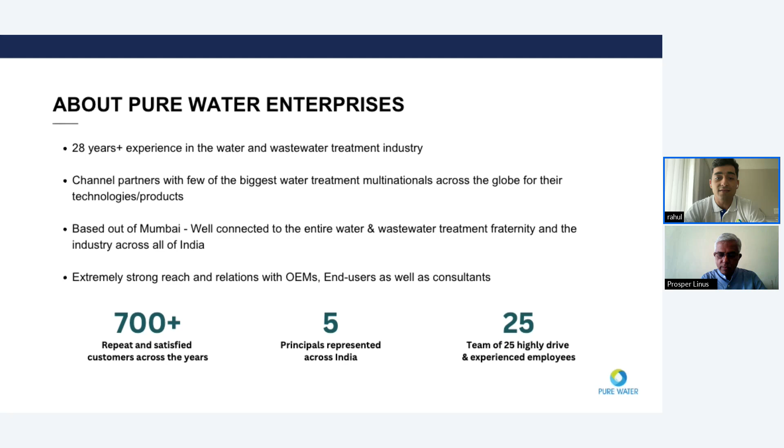Pure Water Enterprises has been working in the water and wastewater treatment industry for the past 28 years. We work very closely with OEMs, consultants, and end users all across India, mainly in reuse, recycle, and advanced treatment applications. As a company, it has always been an endeavor to bring proven world-class global technologies to the Indian market and conditions, whether it is Veolia's UF, RO, NF, and MBR membranes, Purolite's specialty ion exchange resins, Energy Recovery's pressure exchangers and booster pumps, Xylem's submersible mixers and UV, and even NatureWorks' glass filtration media. We always strive to get the best technologies in India.

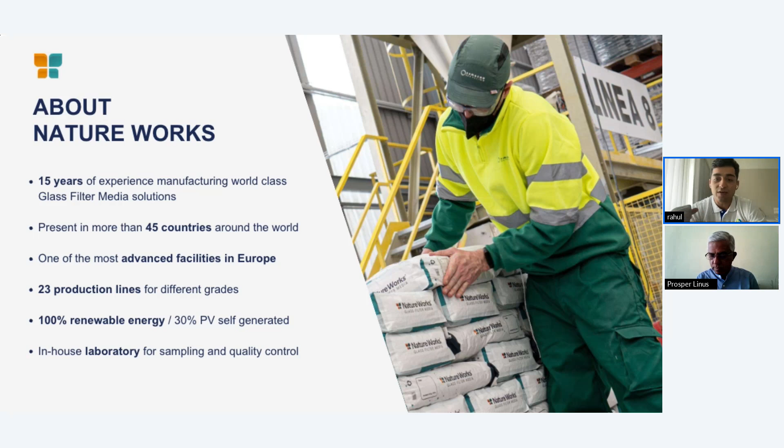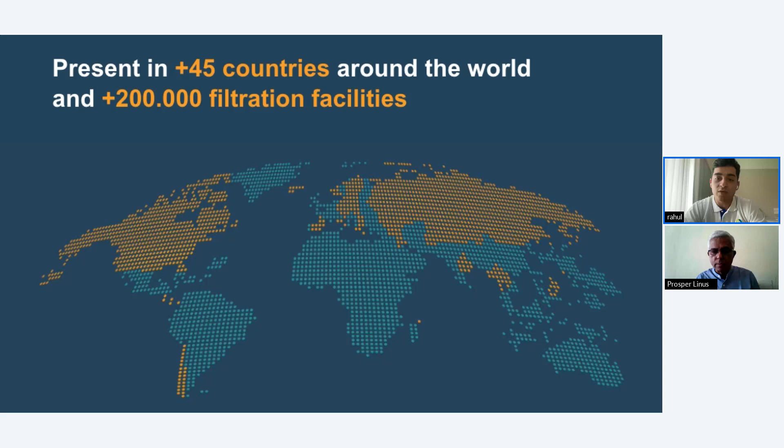NatureWorks is based in Alicante, Spain, and specializes only in glass filtration media. This focus is extremely important as this is not a side product for them, it is their core expertise. NatureWorks operates in over 45 countries with more than 200,000 installations, that's 2 lakh installations all across the world. We also have approximately 200 plus installations in India, and this number is growing very quickly across various industries and applications.

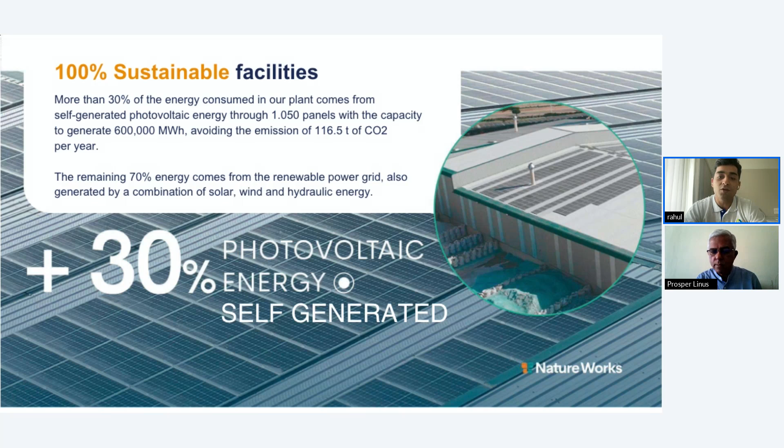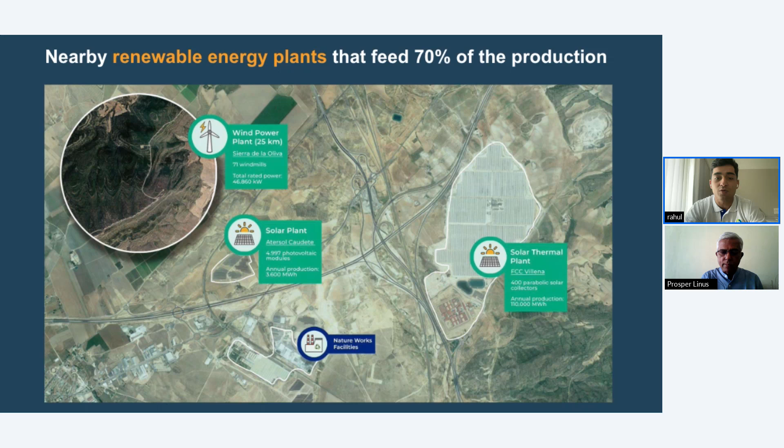The manufacturing process followed at the NatureWorks facility in Spain is 100% renewable powered, which speaks even more to their unwavering commitment towards sustainable practices. 30% of the total energy is self-generated through photovoltaic panels installed in their facility, whereas the other 70% comes from a renewable power grid running on a combination of wind, solar, and hydraulic energy. Speaking from a logistical point of view, NatureWorks has direct access to the world's major ports through the Valencia port.

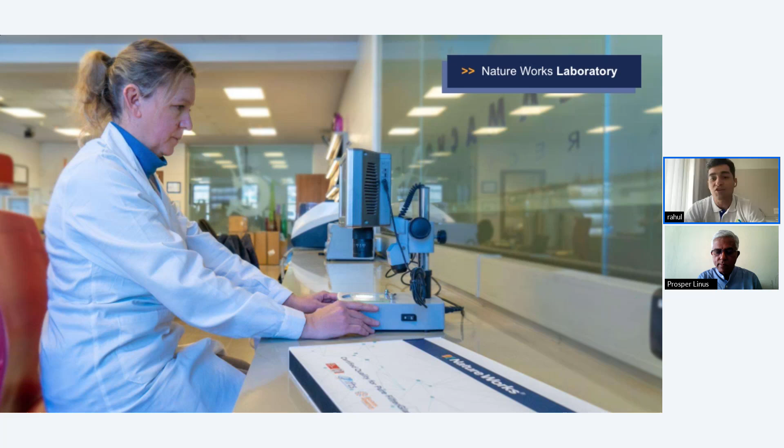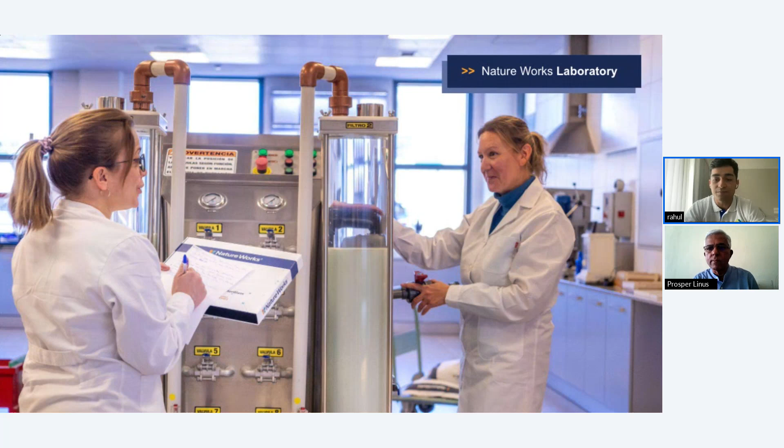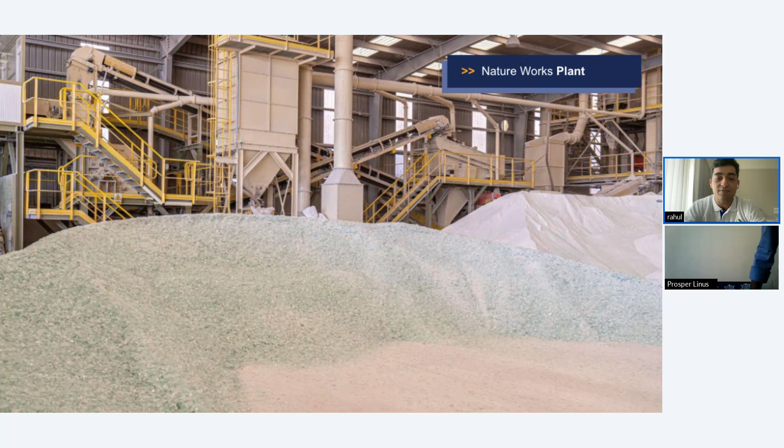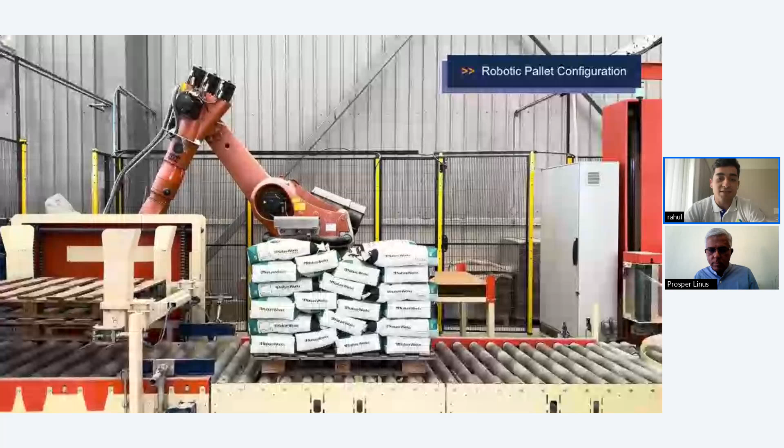In the next few slides, we will walk you through the various state-of-the-art facilities at the NatureWorks Spain factory. What really matters here is consistency and control over even the smallest steps in the entire manufacturing process. Through continuous investment in R&D and product development, NatureWorks makes sure that their glass media is constantly evolving and keeping up with advancements in the market and market needs. Every step of the manufacturing process is entirely controlled. The facility adheres to the highest standards of sanitation and cleanliness, reflected by numerous certifications such as NSF 50 and NSF 61. The automated packaging ensures that every batch performs the same. Consistency and predictability is key in filtration applications, and our glass media helps achieve just that.

Let's take a step back now. Sand has been used for water filtration applications for the past 200 years. It is reliable and gives acceptable results, but it hasn't evolved since. Meanwhile everything else around it, including the vessel, the internals, automation, everything else has advanced. This results in a huge gap: limited efficiency, higher water use, higher energy consumption, water channeling, and biofouling, all of which can seriously hamper the efficiency of a filtration system. That's the issue we are going to address today.

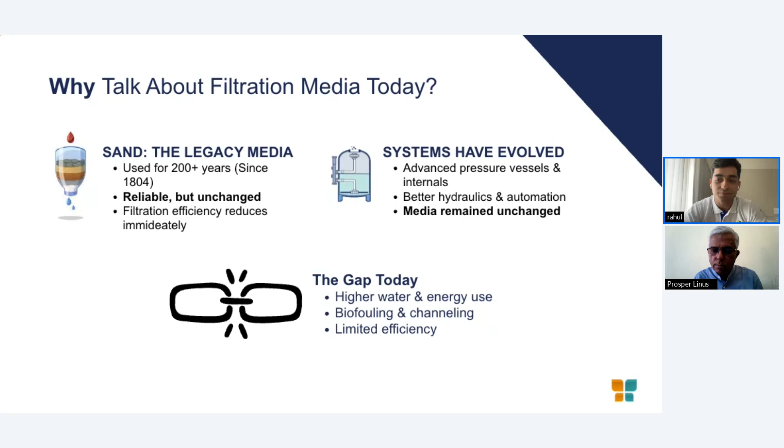NatureWorks glass media is specifically engineered for a very accurate particle shape, size, curvature, and surface. Hence, it is controlled in nature and very uniform. It is not just crushed glass, it is engineered glass. This allows uniform flow paths, higher effective surface area, long life, leading to outstanding filtration, and eventually significant water and energy savings. On the long life subject, they actually have case studies where the life of the glass media has even surpassed the life of the vessel itself.

So now I would love to bring on Mr. Prosper Linus, the country head of NatureWorks India, to take over from here to introduce our glass media offerings and subsequently talk about its comparison with silica sand in every aspect, specific applications such as UF and RO membrane protection and side stream filtration in cooling towers, and finally end with 3 real-world case studies from varying applications and industries. So over to you, Mr. Prosper.

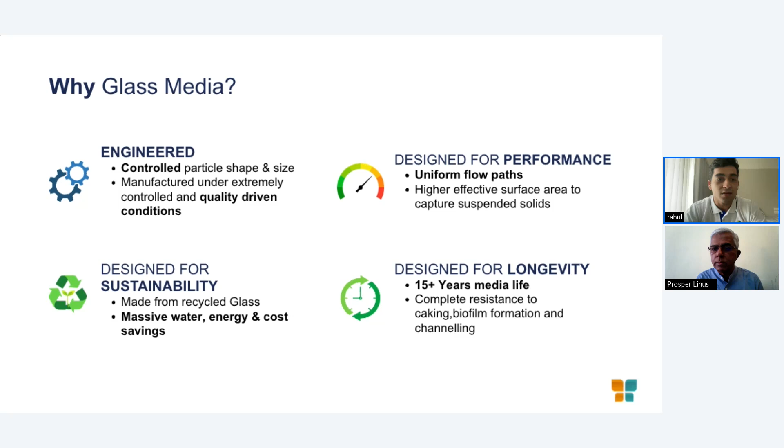Thank you, Rahul, and thank you all those who are attending this. As I was introduced, I'm Prosper Linus. I'm heading the operations in India, along with my colleague, Mr. Viplo Srivastava. So I'm excited to take you through the rest of the presentation, and I hope this will be useful to you. Let's start.

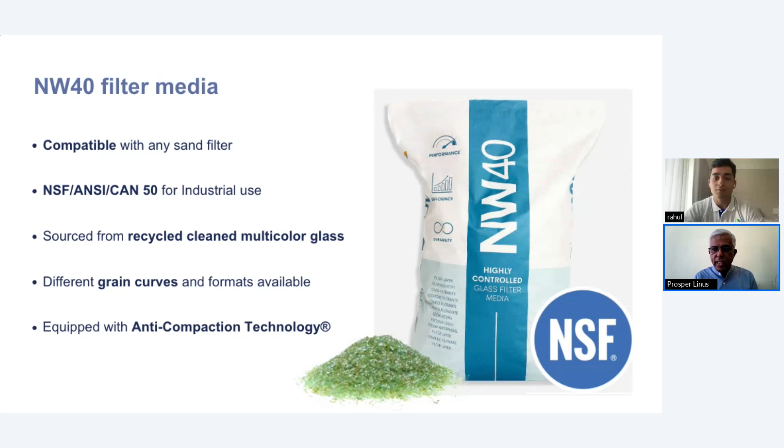This is NW40, by far our most widely used glass filter media for industrial and wastewater applications. Besides some very fine filtration, the most important point is compatibility. The NW40 can be used in existing sand filters, so customers don't need to change vessels or internals. It is NSF 50 certified for industrial use and manufactured from recycled, cleaned, multicolor glass, primary green in color. What really differentiates it is the anti-compaction technology, which keeps microchannels uniformly open, preventing caking, channeling, and pressure drop buildup over time.

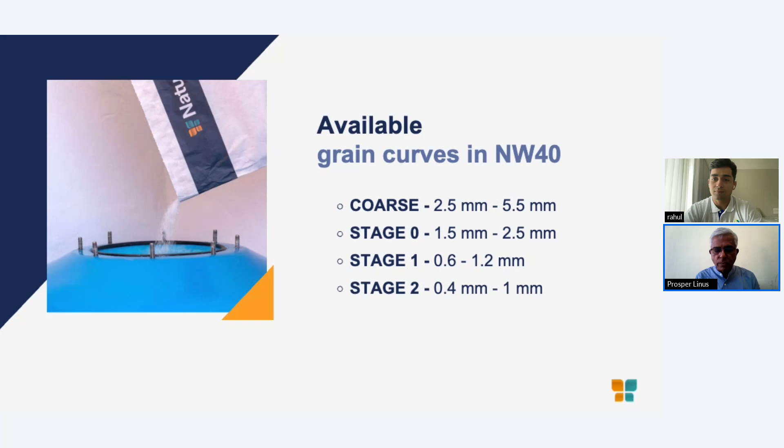Unlike sand, NatureWorks glass media offers very precise and consistent grain curves. On our NW40 media, it's available from coarse support layers all the way down to stage 2 fine filtration. This allows us to design multi-layer filters with predictable head loss, filtration efficiency, and backwash patterns. From the supply and logistics standpoint, the NatureWorks glass media is supplied in both 20 kg bags for smaller installations and 1000 kg big bags for larger municipal projects. This makes handling, loading, and logistics simple, whether it is a retrofit or a greenfield installation.

Now that we have understood what the media is and how it is configured, let us deep dive into how it actually performs compared to silica sand.

Before we go into the details, let us step back and summarize where glass media clearly outperforms silica sand. There are four clear advantages. Firstly, filtration performance, especially for fine turbidity and total suspended solids. Secondly, water and energy efficiency, driven by lower pressure drop and fewer backwashes. Thirdly, durability, meaning stable performance over many years. And finally, overall cost savings, which come from all of the above. I will now take you through each one of these in more detail.

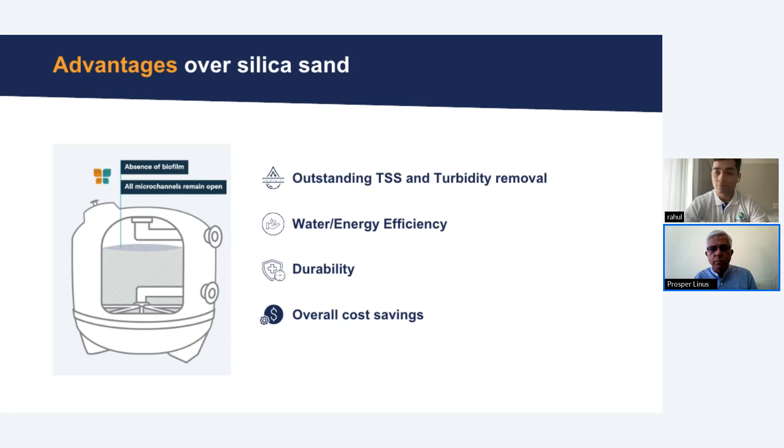Let us first look at filtration performance, as this is the most important role. Glass media excels at removing fine turbidity and colloidal particles. This is where sand struggles. The most important point here is biofilm. Sand has pores where bacteria settle and grow, leading to clogging and channeling. Glass media has a flat surface where bacteria simply cannot anchor themselves. As flow distribution is uniform, the risk of channeling is drastically reduced and filtration performance remains consistent over time.

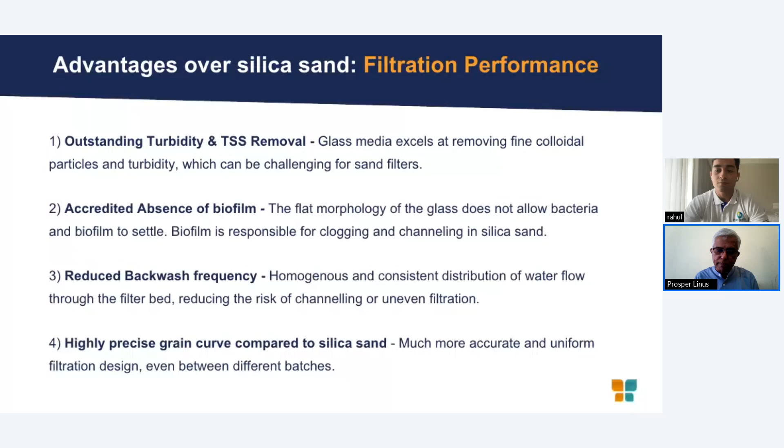Let's try and put some numbers to quantify the difference. NatureWorks glass media can typically retain particles down to 1 micron, whereas silica sand generally retains particles in the 20 to 40 micron range. These results are based on tests conducted by IFTS in the presence of a notary. At a filtration velocity of 20 cubic meters per square meter per hour, over 60% of particles below 1 micron were retained. This is why you see visibly clearer water and better downstream protection. The full IFTS report can be scanned from the QR code in your right bottom. Alternatively, we can share the same with you if required.

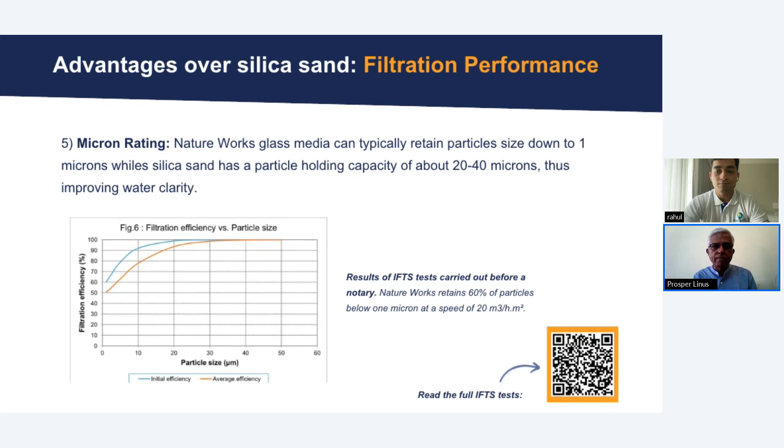Now let us move into energy and water efficiency. The biggest contributor here is the lower head loss over time. Glass media has a very smooth, non-porous surface and uniform particle size. Dirt stays on the surface instead of penetrating pores. As a result, fouling is slower, mud ball formation is eliminated, and pressure drop remains low for much longer. This translates into continuous energy savings, not just during backwash alone.

Then we come to the frequency with which glass media needs to be backwashed. Since the entire surface area of the media bed is available to capture total suspended solids, unlike sand, which compacts and forms channels frequently, glass media's backwash requirement is delayed significantly. Backwash frequency reduces typically by 50 to 80%, in most cases more than 80%. This is an intermittent saving.

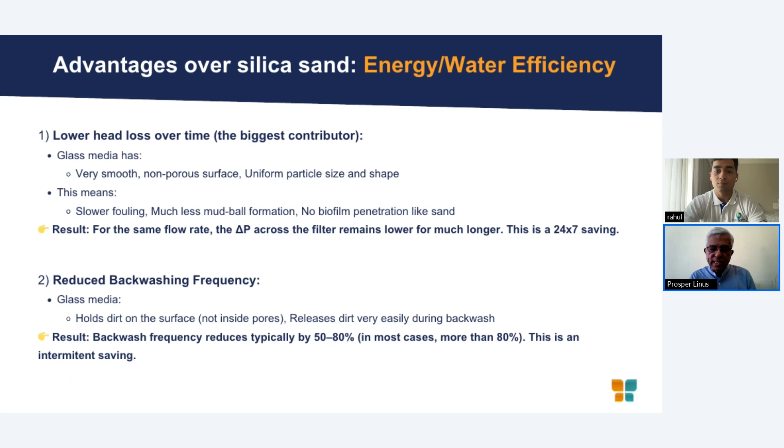The NatureWorks glass media cleans far more easily because dirt is held on the surface, so backwash requires lower velocity and shorter duration. In most installations, backwash time reduces by about 30 to 40%, and the pumping head required is significantly lower. This directly reduces power consumption and treated water losses. So basically, you save water through fewer backwashes, lower duration of each backwash, and each backwash at a lower velocity.

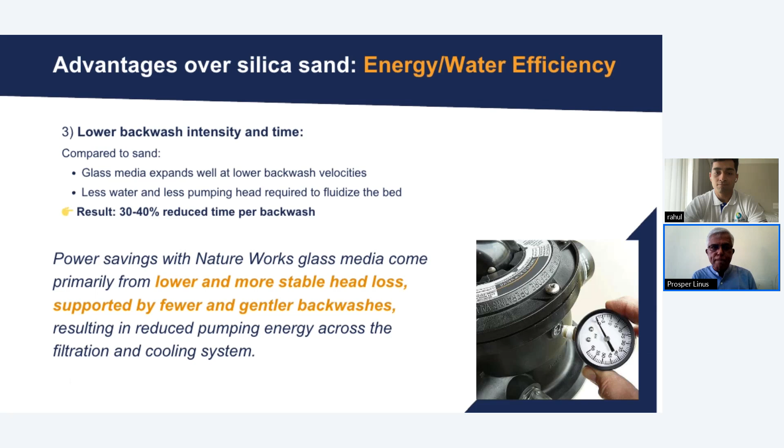Power savings are not one-time or occasional. Every pump in a filtration system is designed for a particular head. When delta P stays low, the pump works closer to its best efficiency point. With glass media, this condition is maintained for a much longer period.

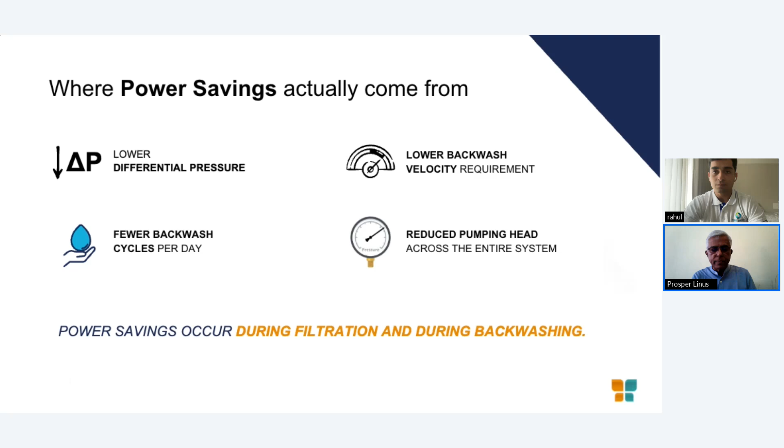Let us put realistic numbers to power savings, using conservative assumptions. Consider a filter operating at 100 metric cube per hour. If glass media reduces the average operating pressure drop by just 0.3 bar, roughly 3 meters of head, at typical pump efficiency this translates to about 0.8 to 1 kilowatt lower power draw per filter continuously during operation. If the filter runs for about 20 hours a day, that is roughly 16 to 20 units of electricity saved per day. Over the year, this adds up to 5,300 to 6,600 kilowatt hours per filter, without changing pumps, motors, or operating philosophy.

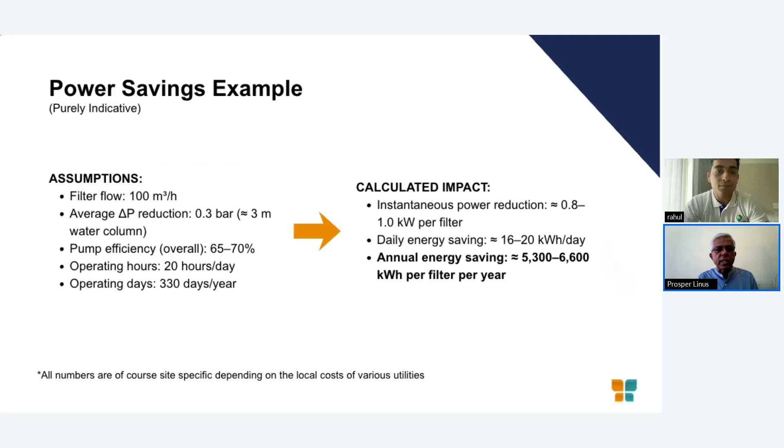Another major advantage is durability. Unlike sand, glass media does not cake, compact, or break down over time. There is virtually no attrition loss. This means filtration performance remains consistent year after year. A well-operated NatureWorks glass media has a life of 15 years, and can exceed 20 years too.

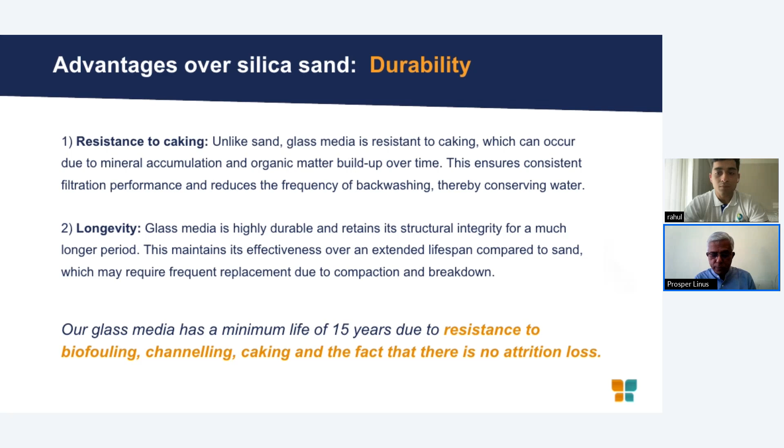Capital costs for NatureWorks glass media compared to sand is definitely higher. But combine all the above factors, lower backwash water, lower pumping energy, reduced chemical usage, and longer media life, and the overall operating cost reduces significantly. Even though glass media costs more initially, the life cycle cost is substantially lower compared to silica sand.

And again, I stress that much better filtration quality is the real game changer. There are so many plants operational in India today with just sand filters as pre-treatment to RO plants. NatureWorks glass media can really upgrade the performance of RO systems. Similarly, there are many UF plants facing suspended solid loads higher than design, especially in wastewater treatment, where inlet parameters keep changing. A NatureWorks glass media upgrade can make the UF or RO systems work exceedingly better. We have many such instances wherein the small cost of shifting from sand to NatureWorks glass media has made operations very smooth and consistent.

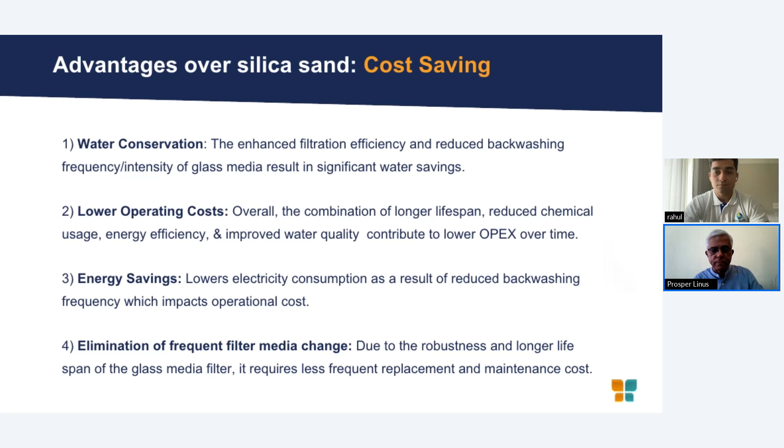Sand filters are typically backwashed at a pressure drop of about 0.8 to 1 bar because beyond this, pore plugging and mud ball formation accelerate. Glass media, on the other hand, should be backwashed earlier at around 0.45 to 0.6 bar. Beyond that, there is no benefit because dirt is already surface held. But although the trigger delta P is lower, the rate of pressure drop buildup is much slower, which is why overall backwash frequency reduces by 50 to 80%.

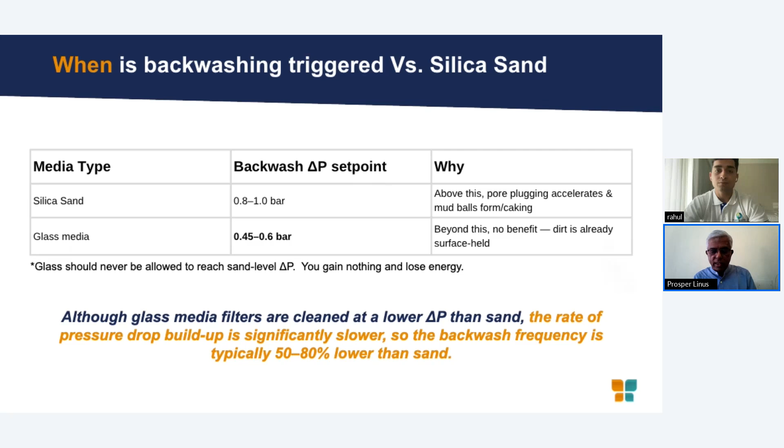The NatureWorks glass media is not just a drop-in replacement for sand, it is a genuine upgrade at possibly the lowest capital cost. We strongly believe that this is one product which punches much above its weight in terms of efficiency, consistency, durability, and affordability.

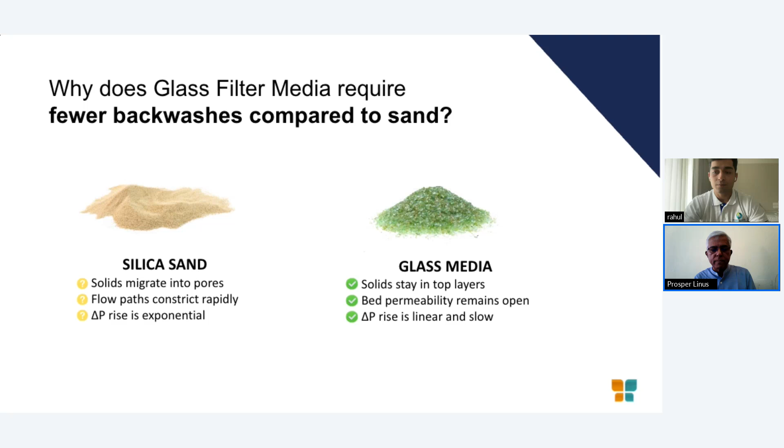A good product becomes a great solution when it is backed by strong technical support and service. Very often, the first question we get is, how do we design this correctly? For existing vessels, we work with the plant flow rate, inlet TSS and turbidity, vessel diameter, height of shell, and existing bed depth. For new projects, we start with the flow rate, inlet water quality, and outlet requirements to design the vessel and media accordingly. We provide design support from selecting the right glass media grades to calculating exact quantities and layer-wise distribution. For standard FRP vessels, we already have design calculations, which means that we can support projects immediately.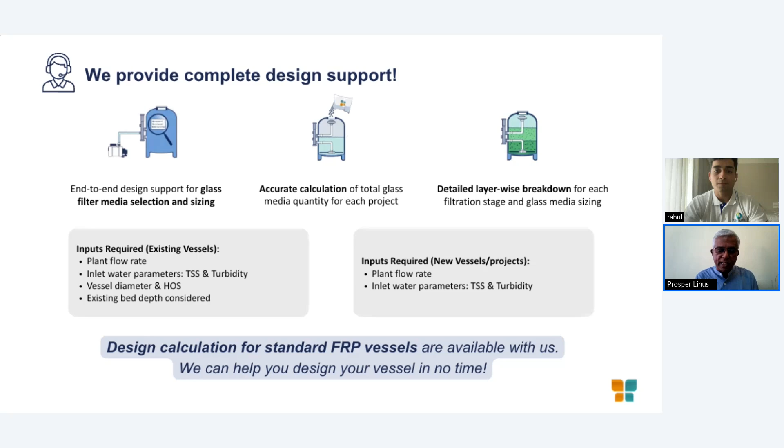For customers who want to validate performance before full-scale implementation, we encourage joint pilot trials. In such instances, we support on-site trials by supplying glass media for small vessel quantities at supportive prices. Trial data is shared and reviewed jointly, which allows us to optimize the final full-scale design. This approach ensures that when the system is commissioned, filtration performance is predictable and reliable. The attached photo of the pilot was done by an OEM customer who later converted this into a 14 metric ton glass media order for a replacement to sand in a UF RO system.

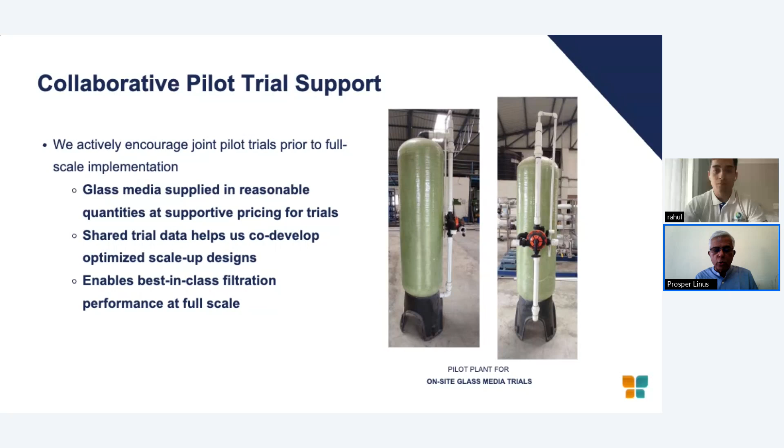Now let us talk about something which I'm sure is on everyone's mind. Where does the ROI of glass filter media come from? Rather than using generic assumptions, we offer project-specific ROI evaluations based on actual plant operating data, existing filtration performance and backwash practices, local water, power, and chemical costs, proposed glass media configuration, and operating philosophy. This ensures informed decision-making before implementation. ROI calculations are available on request.

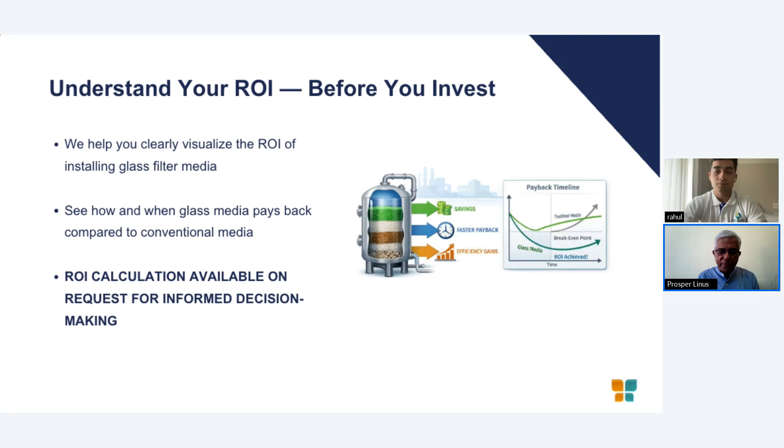This is what our ROI sheets typically look like. We take into consideration a lot of various site-level parameters and come up with calculations which can come closest to real-world results. The ROI or financial return from glass media is not driven by one single factor, but by many continuous and operating savings such as reduced backwash frequency and backwash water consumption, lower and more stable pressure drop across the filter, reduced pumping energy for filtration and backwashing, lower chemical consumption due to improved filtration quality, elimination of frequent filter media replacement, and better membrane performance of UF and RO. These savings operate continuously 24/7 over the entire life of the filter.

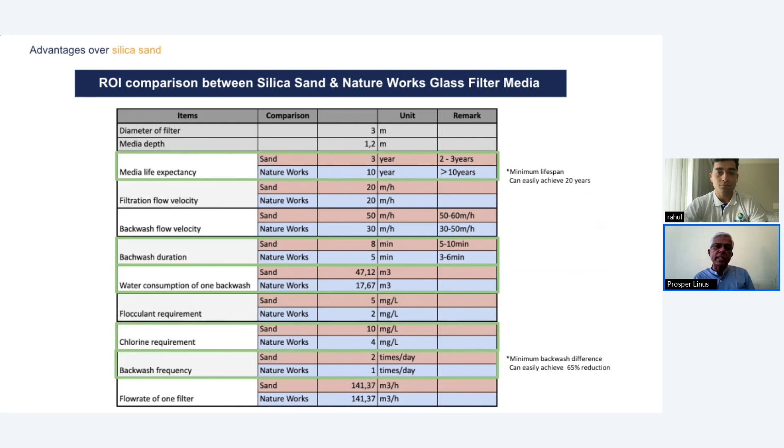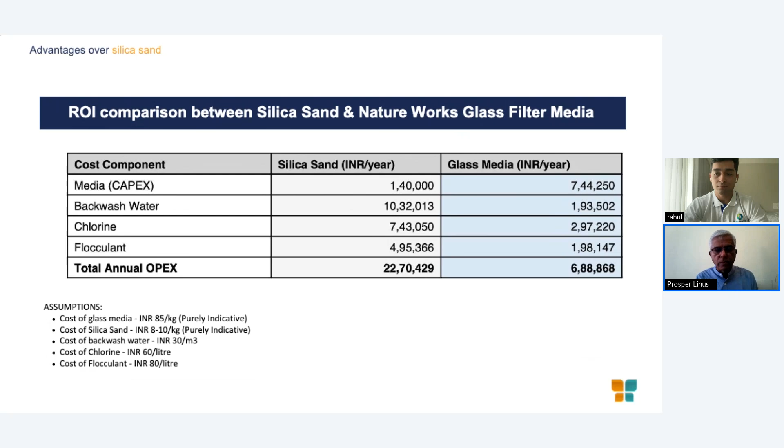A typical payback experience based on field installations across industrial, utility, and infrastructural applications shows the following trends commonly observed. Installations with high backwash frequency or high suspended loads recover investment faster. RO pretreatment and cooling water side stream filtration show strong and consistent payback. Most industrial installations achieve payback within 12 to 24 months. In severe operating conditions, payback can be even shorter. In critical applications where outlet quality is stringent, the glass media ROI is shortest. Longer media life, above 10 years, ensures savings well beyond payback.

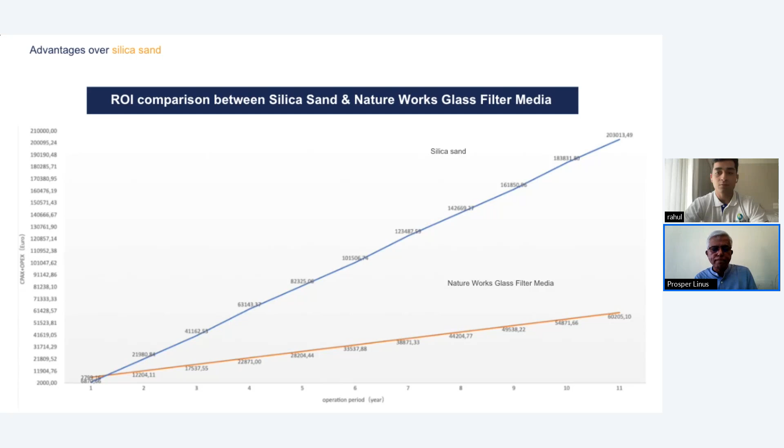So far, we have spoken about how glass media works and why it performs better than sand. Now let us shift gears and look at where this actually delivers value for customers. You will notice that these applications are very different from each other, but the common connect is the need for extremely consistent filtration, lower fouling, and operational stability.

Let us start with RO pretreatment, probably the most common and most sensitive application. In RO systems, the end goal of filtration is very simple: protect the membranes. Glass media helps achieve lower and more stable SDI and turbidity, even when inlet conditions fluctuate. The result is reduced RO fouling, longer CIP intervals, lower chemical consumption, and ultimately longer membrane life, whether the RO is preceded by UF or not.

If there is a UF, the glass media shield helps it to work at its highest efficiency. No unplanned backwashes, no chemically enhanced backwash cleanings, allowing the UF membranes to work at a designed flux. If the UF is not there, then the glass media's responsibility increases as it directly takes on the complete load of fine filtration. So if you have a particular challenge of no UF system with higher suspended solid load, the simplest solution remains changing sand to glass media. Virtually no retrofit challenge, and the plant is up and going in a couple of days' time.

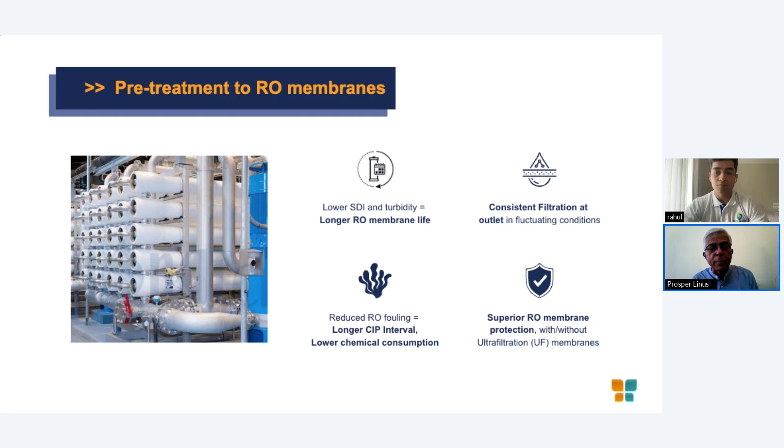I want to pause here and talk about SDI because SDI is often misunderstood. SDI is not just a compliance number, it is an indirect indicator of how much fine particulate matter is entering your RO membranes every day. What is important to understand is that SDI does not behave linearly. A small change in SDI represents a very large change in the particulate load. An RO system operating at SDI 4 behaves very differently from one operating at SDI 2, even though the numbers appear close.

Now let us look at what this means in real operation. Higher SDI accelerates fouling, increases pressure drop much faster, and forces more frequent CIP. Every CIP means chemicals, downtime, membrane stress, and cost. RO membranes fail not only because of one bad day, they mainly fail because of weeks and months of unstable feed water quality. This is where glass media adds real value. Glass media does not just reduce SDI, it stabilizes SDI even when inlet conditions fluctuate. That stability directly translates into longer CIP intervals, lower chemical consumption, and longer membrane life.

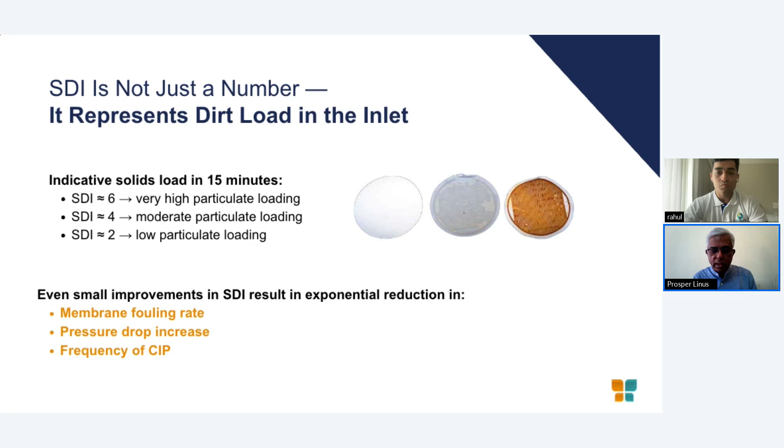Now we'll take you through various applications. Raw water filtration is where sand filters are most challenged, especially during monsoon conditions. River water brings in fine silt and colloidal particles that are difficult to remove consistently with sand. Glass media handles this much better even under high silt loading. Backwash frequency remains lower and filtration quality stays stable. This protects downstream systems and avoids operational surprises during seasonal changes.

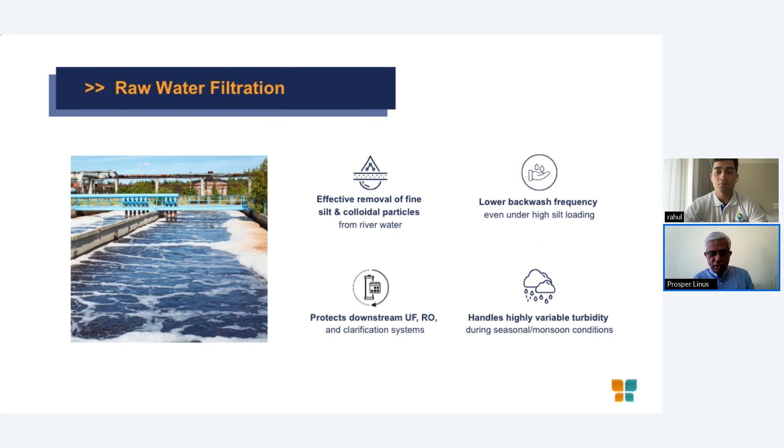Side stream filtration is where glass media delivers some of the strongest performance and economic returns. In cooling systems, fine suspended solids keep circulating and contribute to biofilm formation, fouling, and higher blowdown. Glass media removes these fine circulating solids far more effectively, which significantly reduces biofilm formation in the cooling circuit. This allows higher cycles of concentration, lower blowdown, and substantial savings in water, energy, and chemicals. We are soon releasing a white paper on glass media for side stream filtration with a special focus on power plants. We will be sending this document to all of you as part of our post-webinar offering.

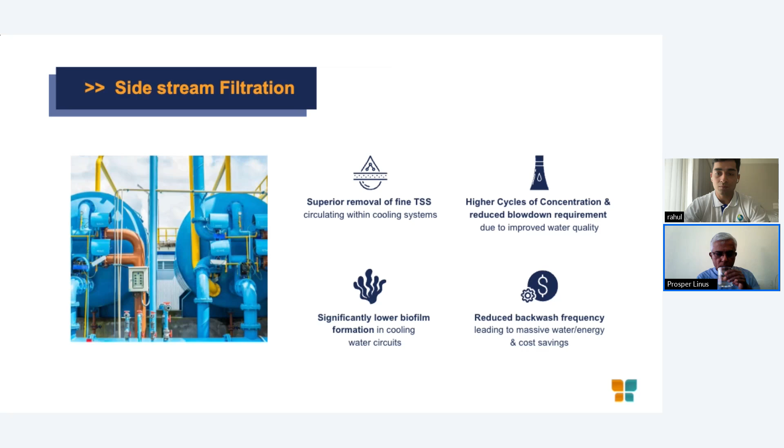I now want to step slightly away from filtration and talk about cooling system behavior. Most of us are familiar with the classic cooling water triangle, which is fouling, microbial growth, and corrosion. What is important to understand is that these three problems do not occur independently. They feed each other. Fouling provides a physical surface where microorganisms can attach and grow. Once biofilm develops, it creates differential oxygen conditions and accelerates corrosion. Corrosion products then break loose and re-enter the system as suspended solids, increasing fouling further.

At the center of this triangle is something we often underestimate: fine suspended solids. These fine particles are small enough to remain in circulation, large enough to deposit on heat transfer surfaces, and sticky enough to support biofilm formation. Chemical treatment can control parts of this triangle, but it cannot remove suspended solids. That is where side stream filtration becomes critical.

By continuously removing fine circulating solids, effective side stream filtration weakens all three sides of the triangle at the same time. This is why fine filtration in side stream filter is not about clarity. It directly reduces fouling, limits biofilm development, and lowers corrosion risk simultaneously. Glass media performs particularly well in side stream filtration because it consistently removes fine suspended solids without rapid fouling or frequent backwashes.

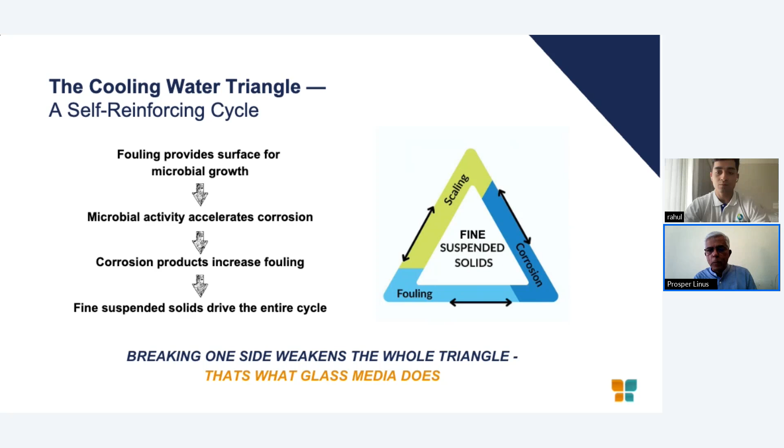The next application is swimming pools, which is a very different application, and expectations are actually very high. The water must look crystal clear, remain hygienic, and perform consistently even during peak usage. Glass media delivers visibly clear water, minimizes biofilm formation inside the filter bed, and maintains stable performance during higher loads. This improves hygiene while reducing operational intervention. In fact, the swimming pool application is where the glass media journey actually began in Europe.

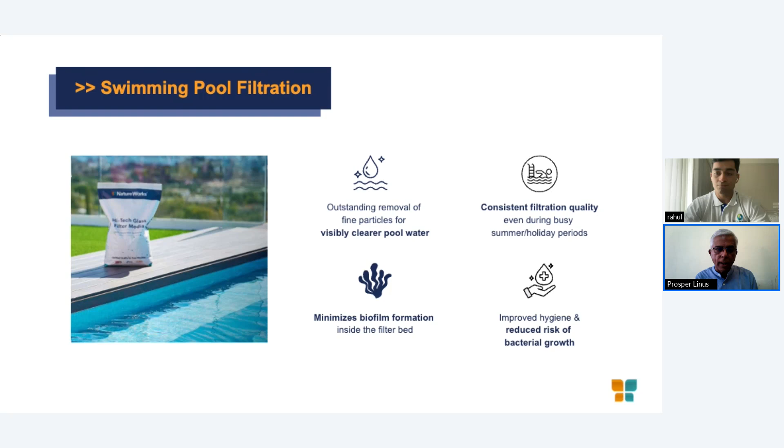Some industries just require an elevated level of filtration protection. Initially, it was pharma and bottled water industry, and now the solar and semicon industry are added to this list. Here, consistency and compliance matter more than anything else. Glass media provides stable filtration quality, prevents bacterial growth inside the filter bed, and helps meet stringent outlet norms.

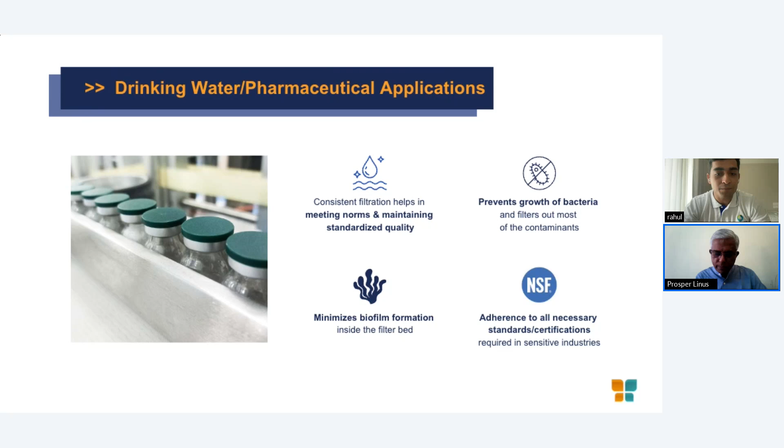Thank you Rahul. Now I want to take a step back from technology for a moment and talk about decision making. Today there are several technologies available that can deliver fine filtration, ultrafiltration, automatic self-cleaning filters, cartridge-based systems, and others. All of these technologies work, but they are essentially new projects. They require new equipment, additional space, civil work, integration with existing hydraulics and automation, and most importantly, time to stabilize.

Now let's look at the reality on the ground. There are tens of thousands of sand filters already installed in cooling towers, RO pre-treatment systems, and industrial water plants. When these systems face suspended solids or fouling issues, customers have two choices: first, introduce a completely new filtration technology, or second, upgrade what is already working. Replacing sand with glass media is not a new project.

It is a retrofit, quick to implement, easy to stabilize, and highly cost-effective. Glass media does not try to replace advanced filtration technologies. It offers the simplest, fastest, and most practical upgrade path for existing systems. Sometimes the smartest upgrade is not a new technology, it can just be about making existing infrastructure work better.

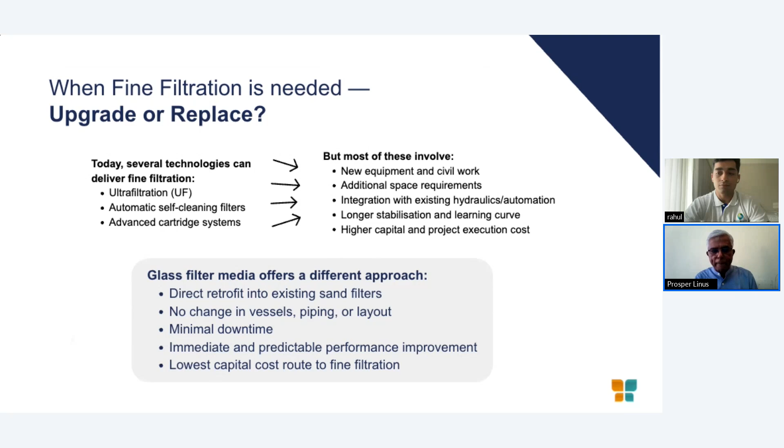You have now seen where glass media is applied. Let us now walk through a few installations, real time, that show how this performs under actual operating conditions. These are not pilot setups, but working plants.

First case study is from a chemical industry effluent treatment plant in Gujarat. The plant treats effluent from a pigment manufacturing industry with an inlet suspended solids of over 100 ppm and turbidity close to 40 NTU. Because this was a new project with UF and RO downstream, the concern was clear: the sand media filter would choke frequently under such high inlet loads. The decision was taken to use glass media right from the beginning with a dual layer configuration.

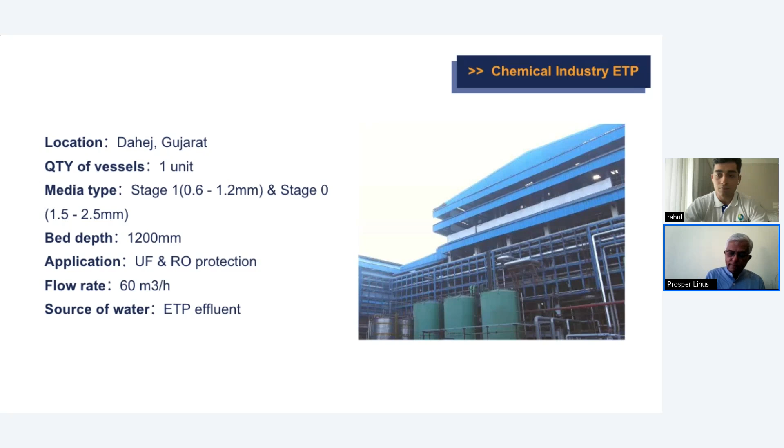We owe it to the passionate OEM and the receptive end customer. They were very helpful. From our side, we were involved in the installation and commissioning process, so in the end it was a joint win. Once commissioned, the outlet suspended solids was below 10 ppm continuously, and turbidity reduced to below 5 NTU. Most importantly, filtration performance remained stable, protecting the UF and RO systems without frequent intervention. It is now more than 18 months since the installation is in place, and the results are the same every day.

This is not about improvement on sand performance. It is about avoiding its limitations.

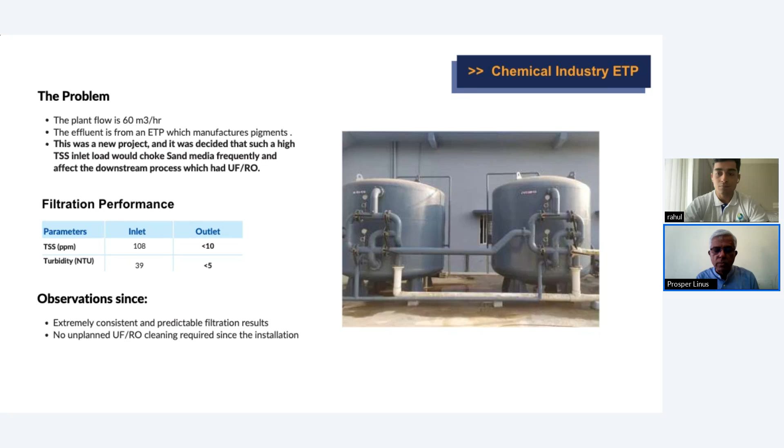The second case study is from a textile industry effluent treatment plant in Maharashtra, handling about 125 to 135 metric cube per hour, and it's a replacement case study. The plant already had filtration in place, but the outlet suspended solids was high, leading to frequently choked cartridge filters and reduced UF membrane life. Backwashing was required every 8 hours, and extended UF cleaning happened every day, which meant shortage of treated water for manufacturing, huge cost in buying additional water, increased chemical consumption, overall high water loss, and constant management attention.

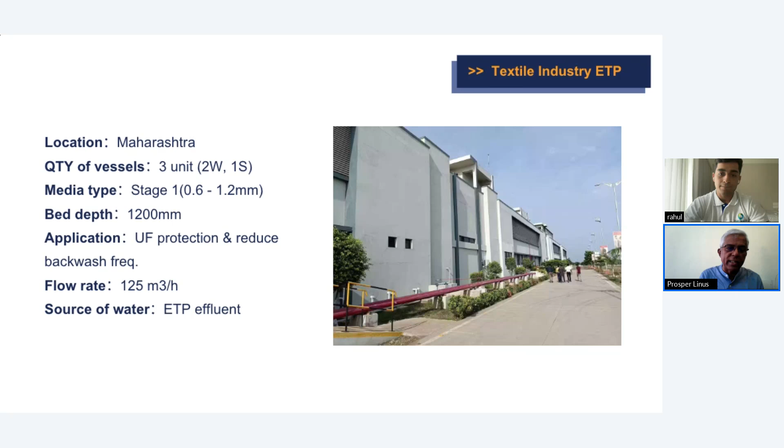Now, after replacing the existing media with the NW40 glass media, backwash frequency reduced to once a day, and outlet suspended solids dropped from 74 ppm to around 6 ppm. This immediately stabilized downstream operations and reduced operational stress. In this case, the biggest gain was not savings, it was stability.

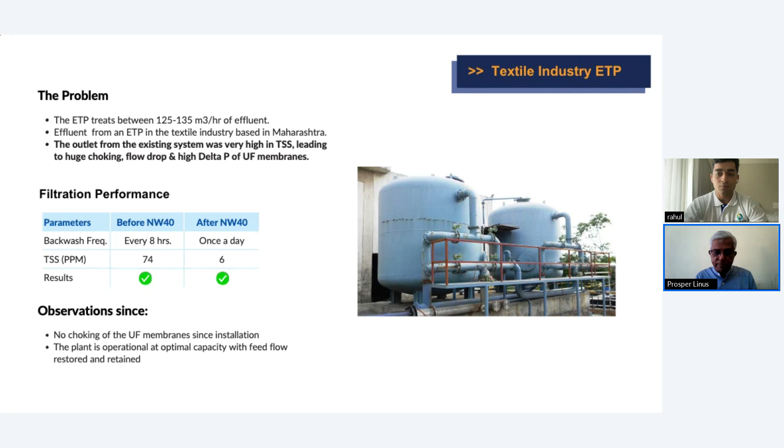And the final case study is a municipal sewage reuse project in China. This installation uses 32 filtration units, treating recycled water at a total flow of 650 cubic meters per hour, primarily for UF protection. A very large international filtration company used our glass media for this large installation.

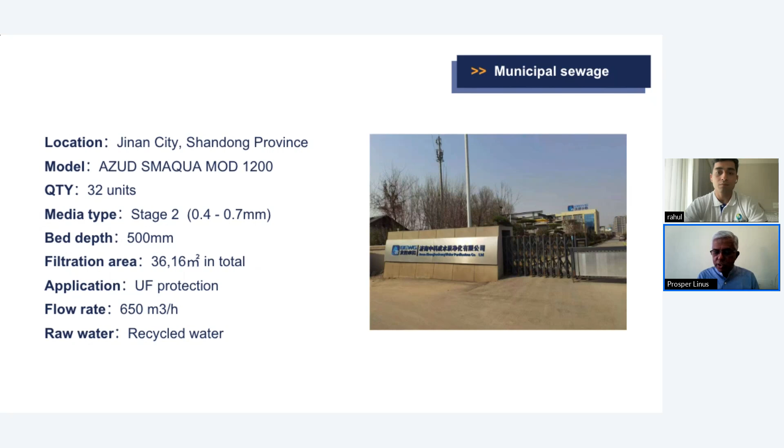As you can see from the results shown on the slide, the performance exceeded customers' requirements. Our glass media was selected for its consistent filtration behavior, predictable backwash characteristics, and long service life, ensuring stable operation across all units. At this scale, predictability matters more than optimization.

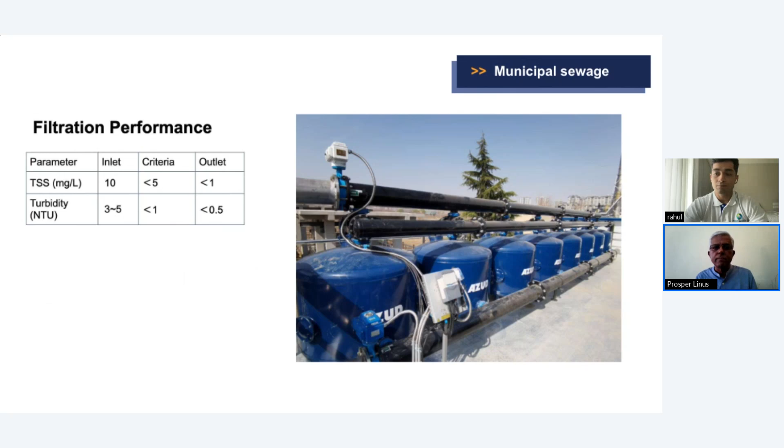Now, in conclusion, filtration media is no longer a small component in the treatment system. It directly influences performance, efficiency, and operating stability. Sand has served the industry well, but today operating conditions demand more consistency and control. Processed water is just too costly and scarce to waste.

NatureWorks Glass Media addresses these challenges by delivering stable filtration, lower fouling, and long-term efficiency. And finally, a good product becomes a reliable solution when it is supported by strong technical expertise and service.